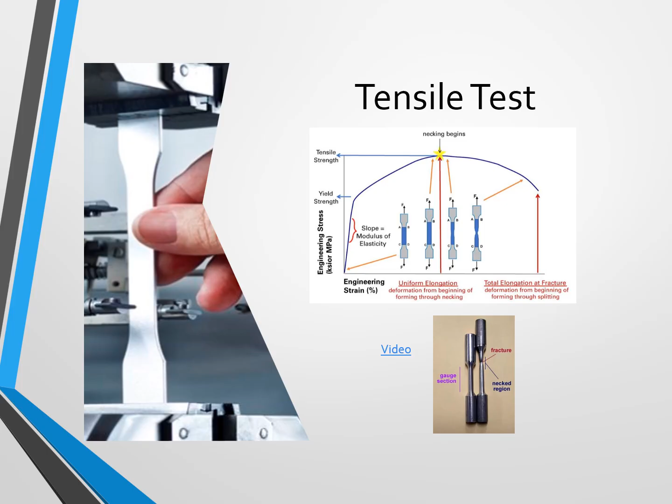All right, today we're going to talk about stress strain curves. When we talked about failure modes, we introduced the stress strain curve that is developed during a tensile test. Today we're going to look at this curve in more detail. But before we can really talk about stress strain curves, we need to review some key material properties.

So let's take a look at displacement versus force. When we apply a load to a material, it tends to deform. For example, if we pull on a rubber band, it will stretch, and the amount that it stretches is called the displacement. So if we look at these three spring experiments, in the first one on the left, there's a mass held by one spring, and the mass will cause the spring to stretch. This stretch is called the displacement.

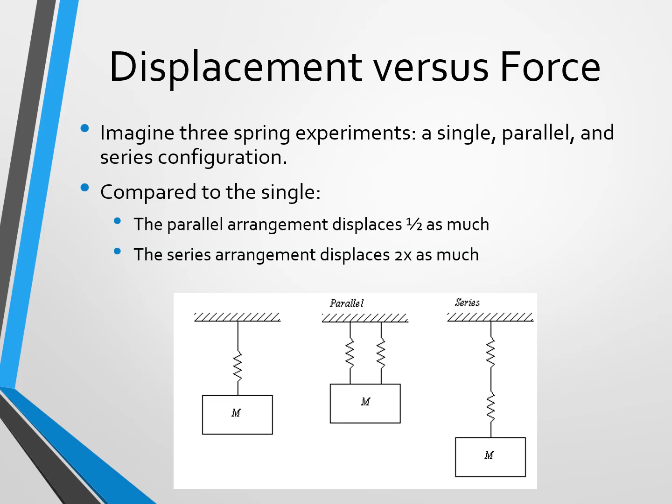If we use two springs instead of one to hold the same mass, the mass will displace half as much. However, if we put the two springs in series instead of parallel with the same mass, the mass will displace twice as much. So the springs are analogous to materials.

Every material of unit length and unit area has a springiness. So like the spring, if we double the area, the material would stretch, or essentially displace, half as much. Or you can think about it as requiring twice the force to displace the same amount. If we double the length of the material and keep the cross-sectional area the same, then the material will displace twice as much. So you can see how the size of the material, and not just the material type, has an influence on how much an object will displace. And we need to be able to describe material behavior that is independent of that sample size.

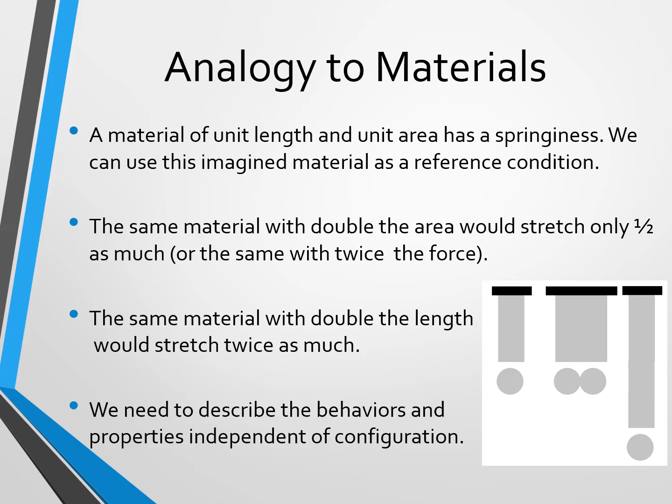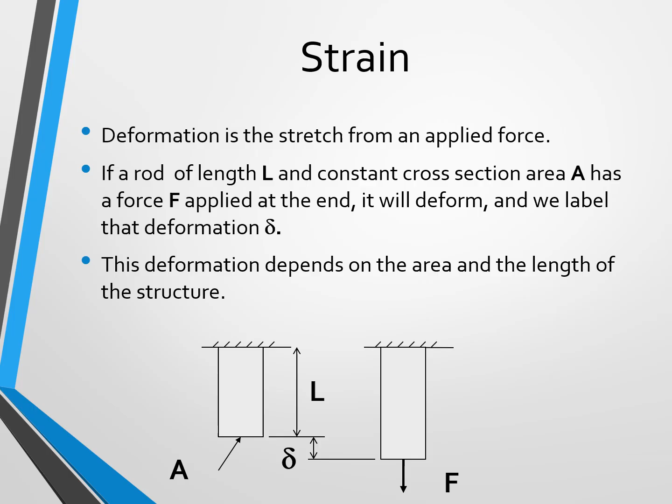So let's look at how we can describe material behavior without considering sample size or configuration. Deformation is the stretch or displacement caused by an applied force, and it depends on the area and the length of the structure. So to eliminate the effect of length, we use strain instead of deformation to describe the material behavior. Strain is defined by the deformation that occurs when a load is applied divided by the original length of the material. And since it's a length divided by a length, the units, it is unitless.

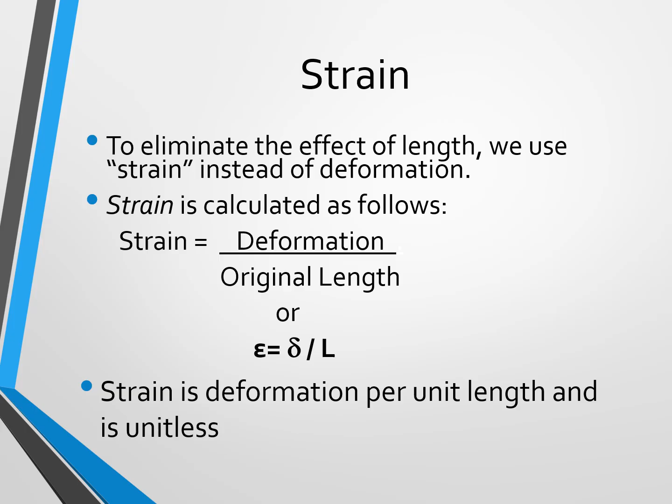Deformation is also influenced by the cross-sectional area. Remember that if the cross-sectional area is doubled, the deformation is cut in half. On the flip side, if the applied force is doubled, the deformation is increased by 2 times for the same cross-sectional area.

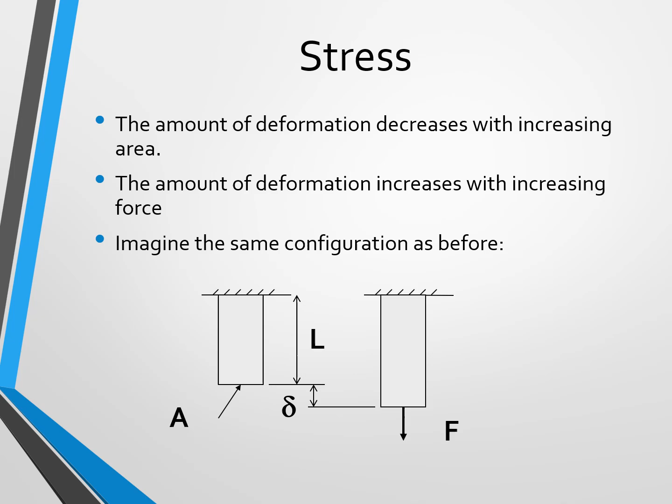So in order to eliminate the effect of force and area when describing a material, we use stress. Stress is the applied load divided by the cross-sectional area. Cross-sectional area is the area over which the force is applied. If the force is applied axially, like in tension or compression, then we use sigma to represent stress. However, if the force is applied perpendicular to the area, as in shear, then we use tau to represent stress.

The key here is that stress is a material property, and it is independent of the sample tested. So if I test multiple samples of the same material, they can all have different cross-sectional areas, but they will all fail at essentially the same stress. Not the same load, but the same stress. The larger samples will take a higher load to fail, but when you take the load at which it fails divided by the cross-sectional area, the stress should all be the same. And the units for stress are force divided by length squared, so it has units of pressure, such as pascals or psi.

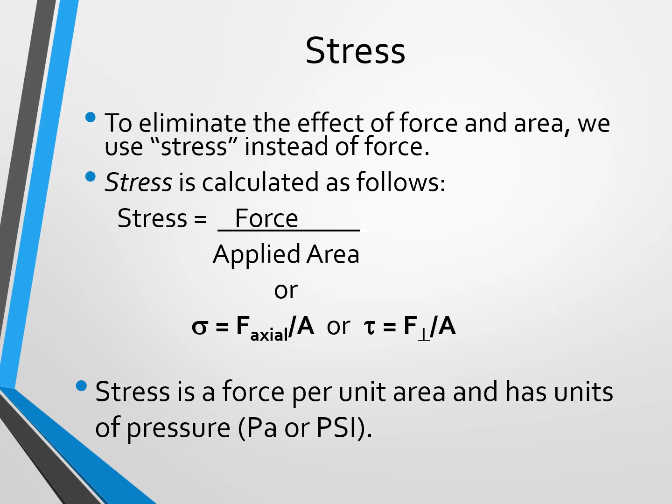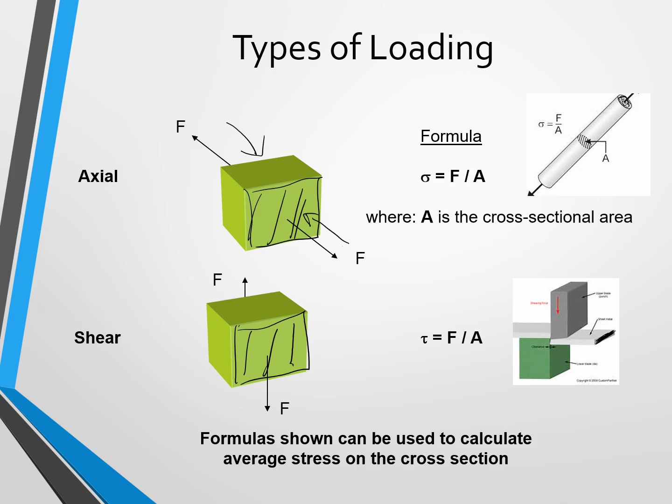Now that we know what stress and strain are, they help us describe material behavior independent of sample size. So let's look more closely at some failure. Tensile failure is when we pull on something, and it typically stretches, causing the cross-sectional area to become smaller and smaller until it eventually breaks.

To test materials in tension, we create dog bone or barbell-shaped samples and put them in a load cell with vice grips, slowly increasing the load. We use the dog bone shape so that the stretch and failure will be localized in the middle of the sample and not at the grips. We know that if the cross-sectional area is smaller, the load required to stretch and eventually break the sample will be lower, so the failure is contained to the middle of the dog bone when we use this shape.

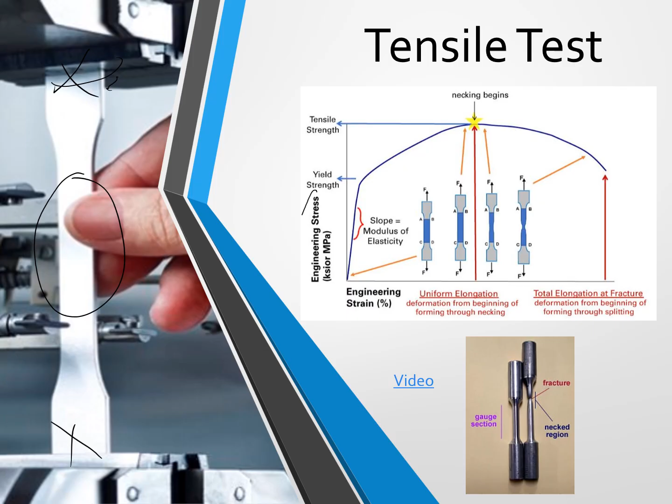As the load is increased, we record the applied load and the displacement. We know that load and displacement are dependent on sample size, so to get the material properties, we divide the load by the cross-sectional area to get stress, and divide the displacement by the original length to get strain. We then plot stress versus strain.

When we do this, we get a plot that maybe looks something like this for a ductile material. At first, when we start pulling, we have a linear region. If we were to stop the test anywhere along this region, the material would return to its original length. This is what we call the elastic region.

Once it reaches the yield point, the material will begin to yield, or deform permanently. We can estimate the yield stress from the graph, from where it goes from linear to nonlinear. In many cases, we don't want our material to deform, so we might design to the yield point.

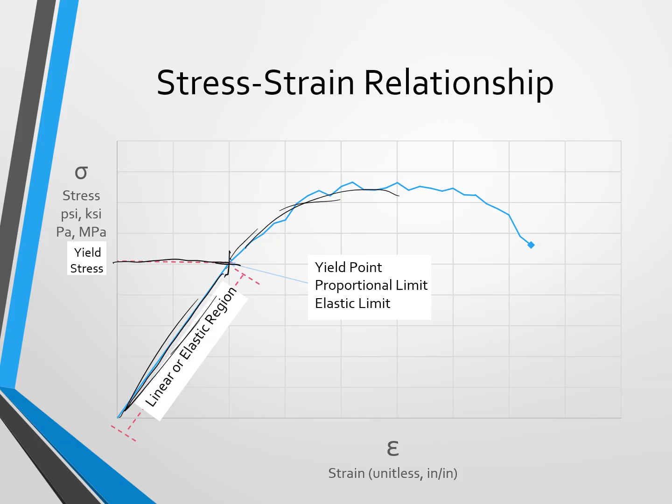Let's take a look at an example. Here we have a steel bolt that is 1/2 inch in diameter, used to mount a sculpture to the ceiling in a building's lobby. If the yield point of the steel is 50,000 psi, we're asked to find how much weight can be supported by the bolt before it yields.

Remember that stress is equal to force divided by area. In this case, our force is weight, so it's weight over area, and we're trying to solve for weight. We can rearrange this equation and say that the weight is equal to the yield stress times the cross-sectional area.

The yield stress is 50,000 pounds per inch squared. For the area, we want the cross-sectional area of the bolt, which is a circle with a diameter of 1/2 inch, so the area is pi r squared. So we multiply by pi, and the diameter is 1/2 inch, so 0.5 divided by 2, squared, in inches squared. The inches cross out.

If you multiply this out, you will get 9,817 pounds. So that is the load at which this bolt will yield in this scenario.

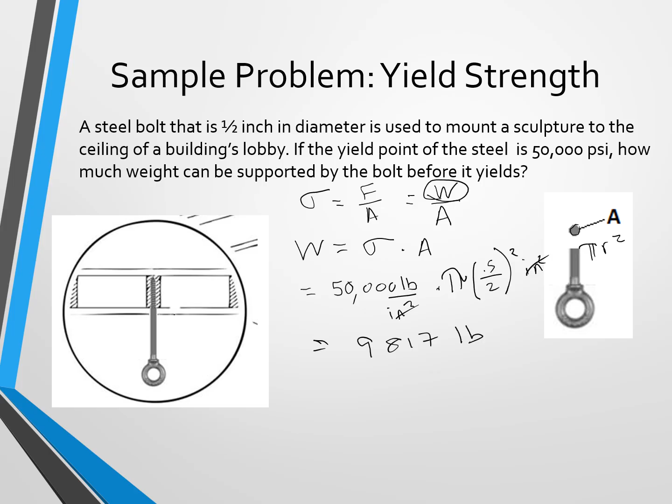Now, rarely, if ever, do we actually want to design right up to the yield point. If the typical load for a bridge is about 20,000 pounds, I certainly don't want to drive across if it were designed to yield at exactly 20,000 pounds—that really would not give me much comfort. So we use a factor of safety, designing for multiple times stronger or stiffer than actually needed. As an engineer, sometimes this is your decision; other times there are legal regulations that tell you what factor of safety you must use. For example, if the factor of safety is 2, it's designed to handle twice the load expected. Typical roof trusses will have a factor of safety of about 3.

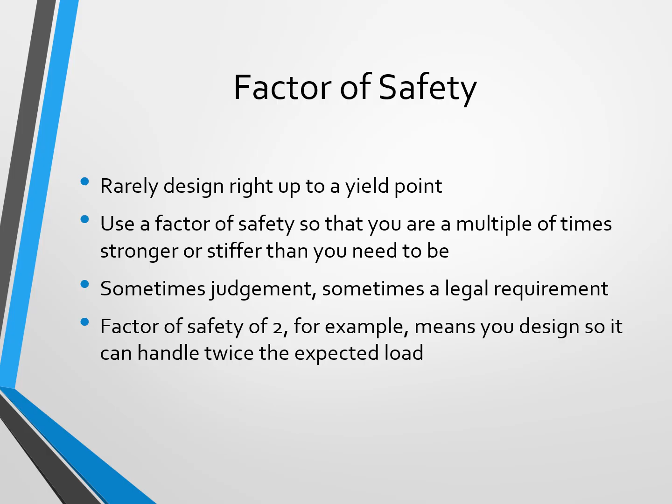So if we go back to that same 1/2 inch steel bolt, and we know that the yield point is 50,000 psi, same as before—how much weight would you allow it to hold with a factor of safety of 4? Again, sigma equals force, or weight, divided by area. So our weight is the yield stress times the area, which is pi times 0.5 divided by 2 squared, and the weight is 9,817 pounds, just like before.

But if we want to design it with a factor of safety, we're only going to allow it to hold 1/4 of that. So if we take this weight and divide it by 4, we get that this is only allowed to hold 2,450 pounds. So that would be our design limit with a factor of safety of 4 for that bolt.

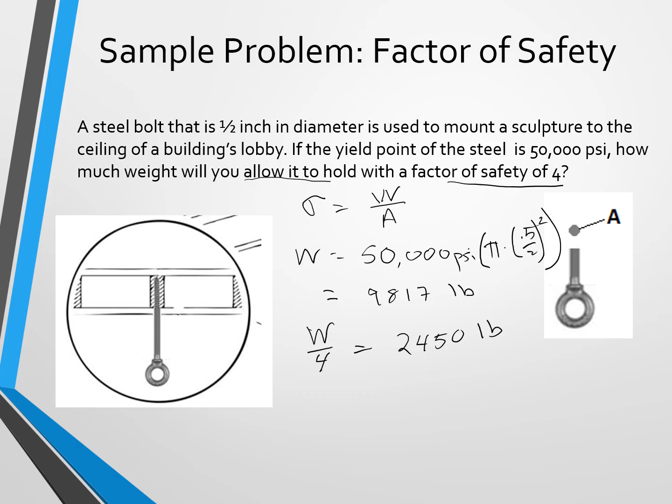So let's look back at the stress strain curve. This area where stress versus strain are proportional before we reach the yield point is elastic deformation. The slope of this linear segment is called the modulus of elasticity. This modulus can be thought of as the material's stiffness or its resistance to deformation. The greater the modulus, the stiffer the material, and essentially the smaller strain you'll have for a given stress.

An elastic deformation is not permanent. The material will return to its normal shape once the applied load is removed. We can calculate the modulus of elasticity as the change in stress divided by the change in strain in this linear region. And since strain is unitless, modulus of elasticity has the units of pressure, or psi, or pascals. Again, keep in mind that the stiffer the material, the higher the modulus, and thus the slope of this curve.

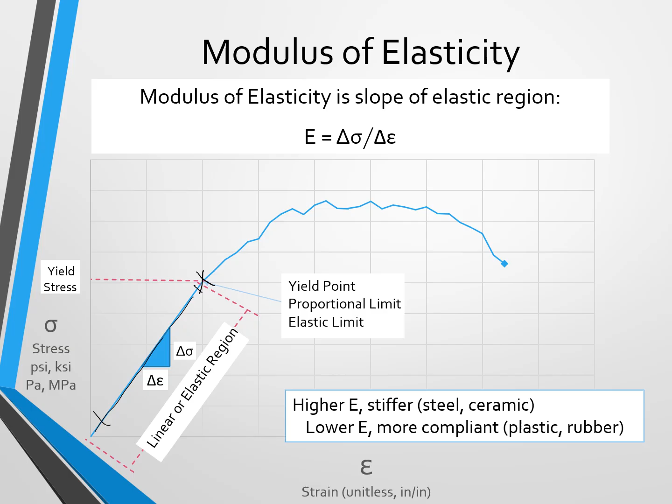All right, so let's look back at that same bolt from the previous example. Now, if the bolt is 10 centimeters long, how much will it stretch if a 5,000 pound sculpture is hung from it?

So remember that modulus is the change in stress over the change in strain. If we rearrange that, we get the change in strain is equal to the change in stress divided by the modulus. Well, our original stress and strain are both equal to 0. So really, we're just going to talk about what is the stress and strain at that point, since we're starting at no load.

Okay, so we can first calculate sigma, the stress. Again, that's going to be the weight divided by the cross-sectional area, where my weight is 5,000 pounds. And my cross-sectional area is pi r squared, so pi times 0.5 divided by 2, squared, and that's inches squared. And so my sigma, or my stress there, is 25,460 psi.

Okay, and now we know what the modulus is, so we can plug that in here. So the change in strain is going to be this stress, 25,460 pounds per inches squared, times... let's see, this is not correct. This would be divided by, sorry about that.

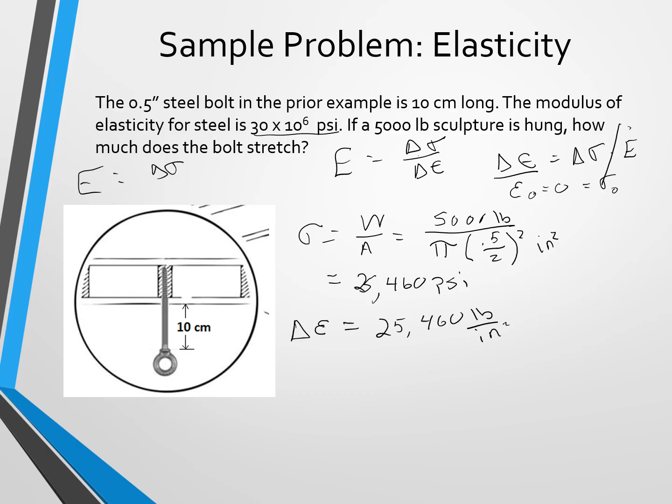So strain is the change in stress divided by the modulus, not multiplied by the modulus. Let me go back. Modulus is equal to delta stress over delta strain, and so if I move that over, delta strain is equal to delta stress divided by the modulus. So we take this and divide it by the modulus, which is 30 times 10 to the 6 pounds per inches squared. And if you multiply that out, you get 8.5 times 10 to the negative 4. The units will cross out. Remember that strain is unitless, so that makes sense.

And then, if you remember, strain is defined as the change in length divided by the original length. So if I want to know how much the bolt stretches, I want to know what delta L is, the change in length. That's going to be the strain times the length. Strain is unitless, so it doesn't matter what units I put here. I'm going to get this answer in whatever units I use.

So 8.5 times 10 to the negative 4 times my original length, which was 10 centimeters. And so the change in length will be 0.0085 centimeters. So that is how much the steel bolt will stretch when a 5,000-pound sculpture is hung.

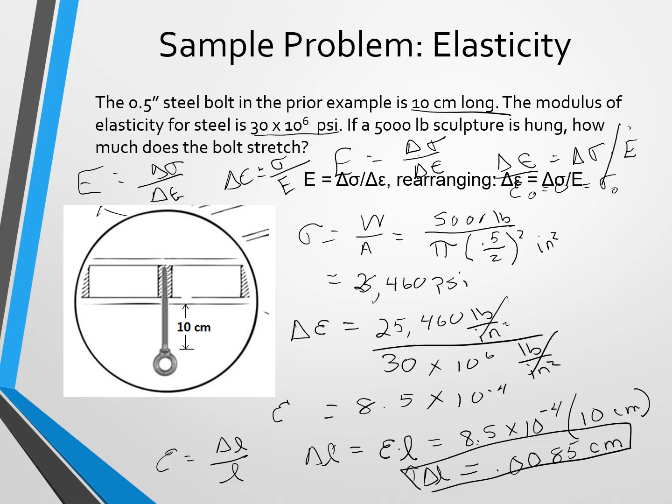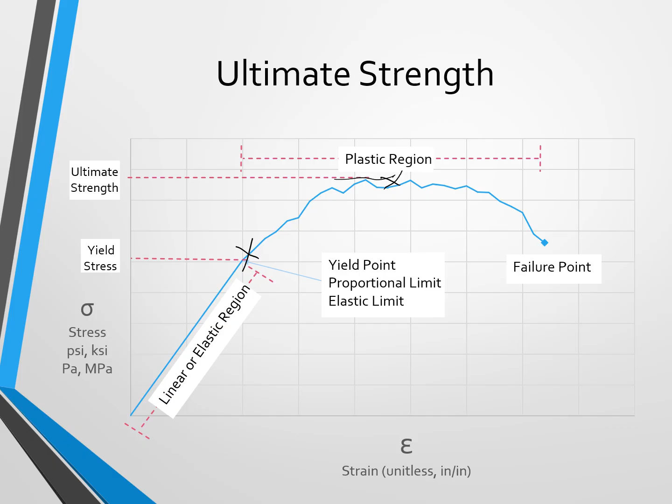Okay, so now once we reach the yield point in our stress strain curve, the material then begins to go into the plastic region. Beyond this point, all of the deformation is permanent. The material will continue to stretch until it eventually fails. The ultimate strength is the peak stress, so we can read that from this curve. There's my ultimate stress.

So if we go back to that same bolt, that half inch diameter bolt used to mount that sculpture, how much weight could it support before it actually breaks or ruptures? Not before it yields, but before it ruptures. So we use that same equation, stress is equal to force or weight divided by cross-sectional area.

So we want the weight, which is the area times the stress. Our rupture strength or stress is 75,000 pounds per square inch, and my area is pi r squared, so pi times 0.5 divided by 2 squared. If we multiply that out, that'll be 14,725 pounds. So this is how much load the bolt can hold before it ruptures, and this is with no factor of safety.

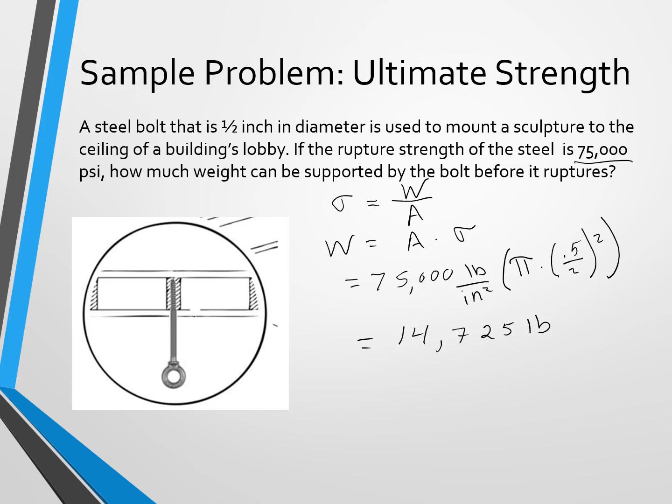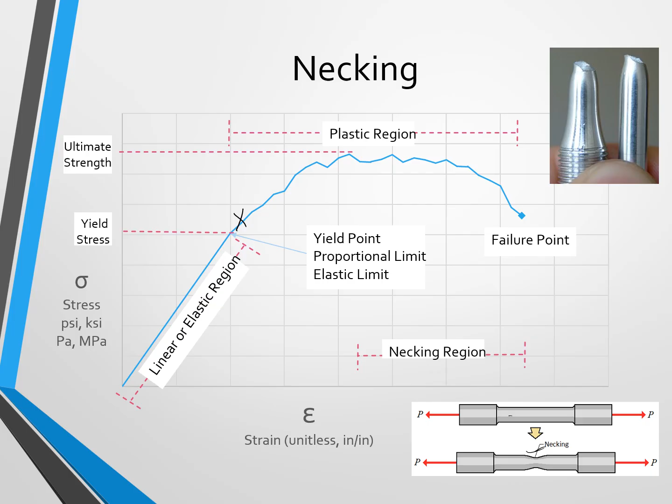In the plastic region, the ductile material will experience what we call necking, where the cross-section decreases at a relatively fast rate because large amounts of strain are localized. Here the results are permanent deformation. When we release the load, it maintains its shape; it doesn't go back to its original length. This occurs in the middle of the specimen because we designed it that way, by making it the narrowest part of the test. So here's my necking region.

Now one thing I want to point out is that we are plotting and calculating engineering stress, not true stress. Engineers like to work smart, and plotting true stress is considerably more work for little to no added benefit. Remember that stress is the load divided by the cross-sectional area. As the sample stretches, that cross-sectional area gets smaller and smaller.

The true stress is the load divided by the actual cross-sectional area at that point. When we calculate engineering stress, we use the original cross-sectional area for all the stress values; we don't take into account that it's getting smaller and smaller. This makes the work a lot simpler, as trying to measure the cross-sectional area as the sample stretches is very difficult and time-consuming, and the results just don't justify the added work. There is generally very little difference, especially when designing in the elastic region or the beginning of the plastic region, so the added effort isn't needed.

Also, we typically apply a factor of safety, so it's really not that important whether we're using engineering stress versus true stress. But if we did plot the true stress, it's going to look something more along this line. The stress actually doesn't ever really decrease.

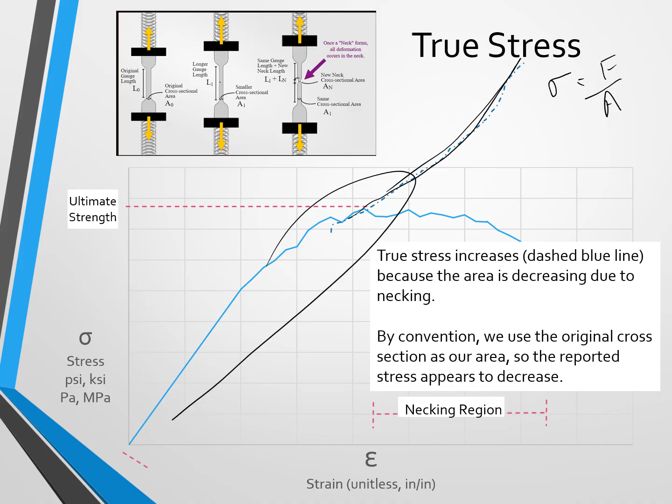So far we've seen how to calculate modulus and how to decipher yield strength and ultimate strength from a stress strain curve. We can also get the rupture strength the same way, just by reading it off the graph. Here's my rupture strength. There are a couple other properties we can also estimate using the stress strain curve.

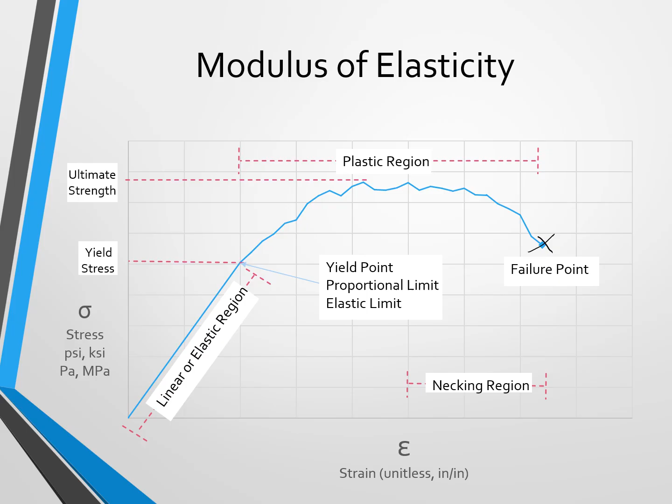The first of these is the modulus of resilience. This is the total energy that can be absorbed per unit volume without creating any permanent deformation. We find this value by integrating the stress strain curve from 0 to the elastic limit.

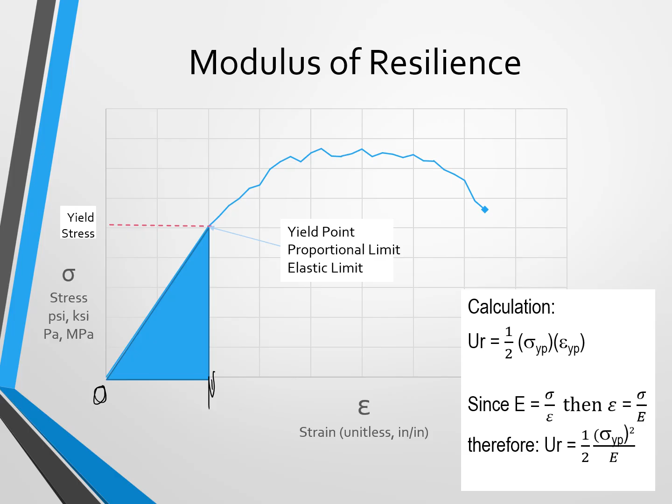If we're designing within the yield stress, most of the time we don't want anything to change in shape. Resilience would be where we want to have lots of stored energy in a modest amount of material—someplace like a knee joint where you're jumping, running, or walking, or maybe clicking on a pen, or a spring that needs to absorb bumps as you're landing. That is a place where we would want high resilience.

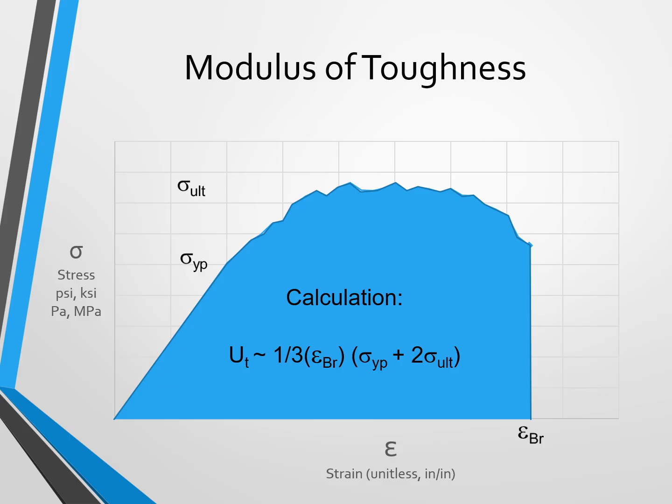Modulus of toughness can also be estimated from the stress strain curve, and this is the ability to absorb energy in plastic deformation—absorbing energy as the material fractures. We can estimate modulus of toughness by calculating the area under the entire stress strain curve, and there's a formula that can help you do that. Toughness is usually a premium where things are designed to fail while absorbing energy, such as a bumper in an automobile accident or in safety equipment.

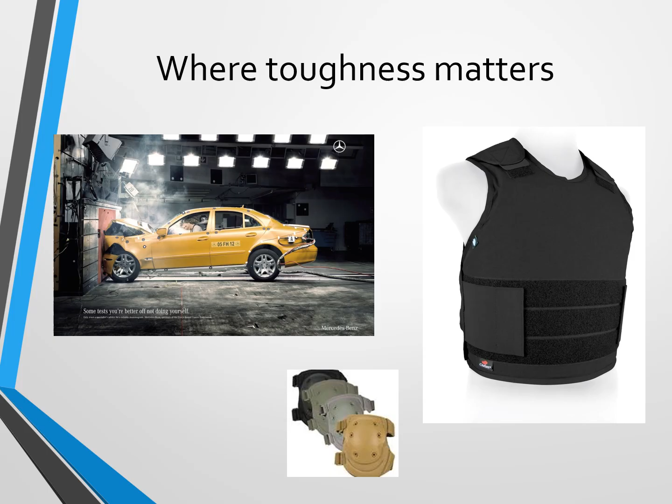So as a recap, toughness is how much energy is absorbed before fracture and while something's breaking, and resilience is how much energy can be absorbed and returned without permanent deformation. So think more like a spring.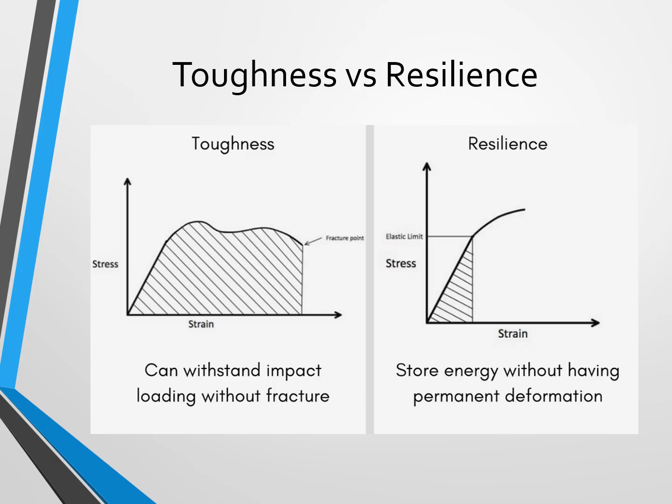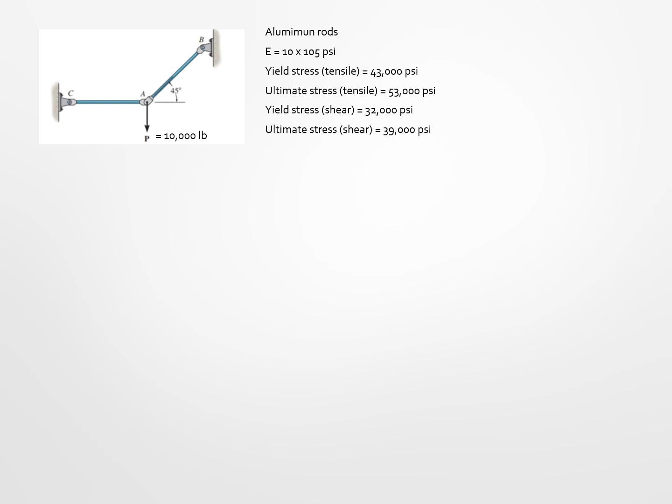Okay, so let's take a look at an example here where I have these aluminum rods, and modulus is given as 10 times 10 to the 5th psi. We have the yield stress and ultimate stress in tension, and the yield stress and ultimate stress in shear.

The first question is asking us what is the minimum diameter to keep this aluminum rod AC from yielding in tension. Well, in order to do that, I first need to know what is the load in that rod, so I am going to first do a free body diagram.

So I have my 10,000 pound load, and then I have a force B, and a force AC and AB. This angle here is 45 degrees. This means I have three forces in equilibrium, so they are concurrent forces.

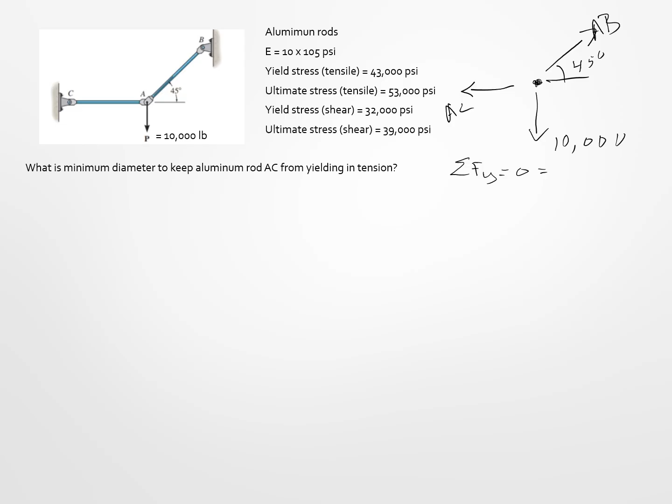So I can use the sum of the forces in the y direction equal to 0 to solve for AB. I'll have negative 10,000 plus AB sine of 45, and if I solve for that, I get AB is equal to 14,142 pounds.

Once I know that, I can do the sum of the forces in the x direction. So I would have 14,142 cosine of 45 minus AC equal to 0, and so AC is equal to 10,000 pounds. So that is the load developed in this aluminum rod.

So if I want to determine the minimum diameter to keep that rod from yielding in tension, I need to say the yield stress is equal to the load divided by the cross-sectional area. So my area is going to be equal to the load divided by the yield stress.

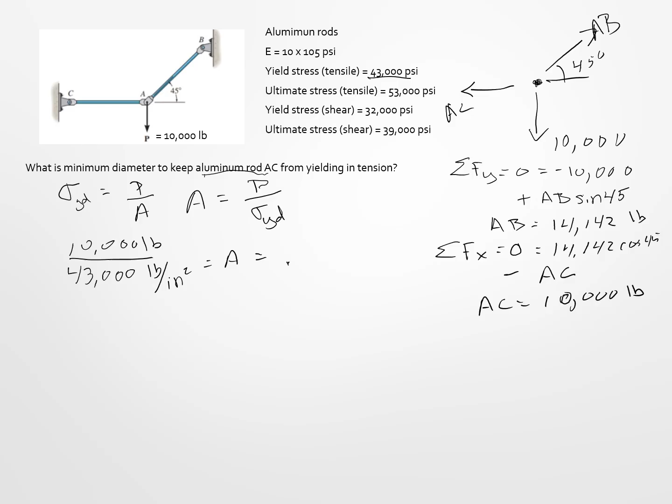My load, I just found out, was 10,000 pounds. And my yield stress is 43,000 pounds per inch squared. That gives me my cross-sectional area. If I calculate that out, I get 0.3289 inches squared. Now the question asked, what is the minimum diameter?

So I'm going to take that and set it equal to pi r squared, or d divided by 2 squared. If you set this equal to that, you get d is equal to 0.647 inches.

The next question is asking, at the minimum diameter for tensile yield, will the rod fail catastrophically in tension if the load is increased to 12,000 pounds? In other words, if I'm using this diameter, will it fail catastrophically in tension if the load is increased to 12,000? We know that at this diameter it will start to yield, but will it actually fail in tension? Let's see.

In order to determine that, I need to see what is the stress that's developed. So the stress is going to be the 12,000 load divided by that cross-sectional area, which is 0.3289. This is my pounds, this is my inch squared. So the load divided by the cross-sectional area gives me 36,485 pounds per square inch.

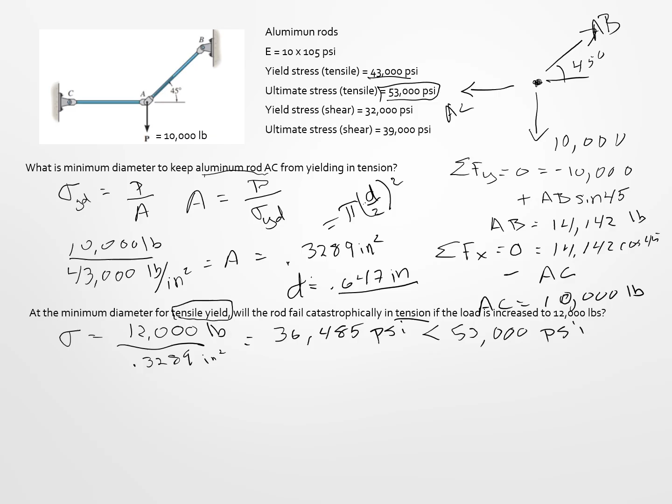So I want to compare that to the ultimate strength in tension, which is 53,000 psi. This is less than 53,000 psi, so it will not fail in tension. It will yield, but it's not going to fail catastrophically. So if we go above the 10,000, we know it's going to yield, but it won't fail.

Then it says, using a factor of safety of 2, what is the max load that the AC rod could withstand before it shears? So let's see, max load. We'll use the ultimate stress in shear. So the stress in shear is going to be the load divided by the cross-sectional area.

So we want to calculate what this load is. We're going to assume it's the same area, and we want to use a factor of safety of 2. So if we're using a factor of safety of 2, we want to essentially say we're only going to allow it to go up to half that strength.

So I'm going to take that 39,000 psi and divide it by 2, then multiply it by this area, which is 0.3289 inches squared, in order to get the load. If I calculate that out, my load is 6,414 pounds, and that would be the max load that this rod could withstand in shear with a factor of safety of 2.